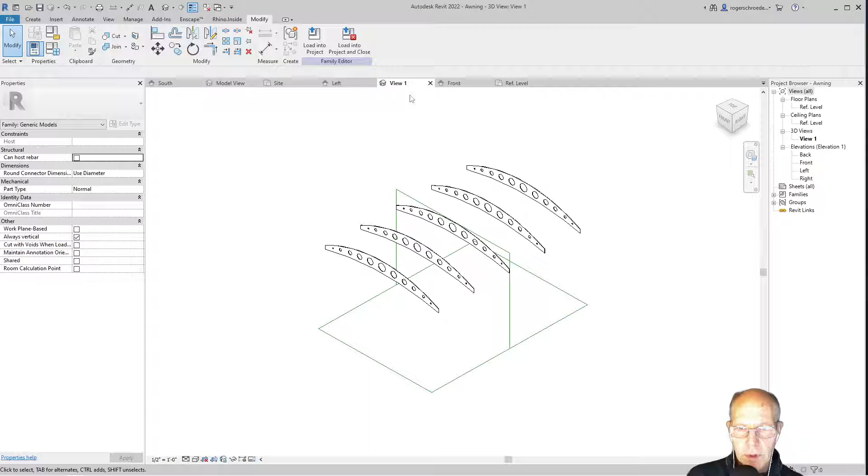So I'm going to go to the front elevation. We're going to start building some glass on this. I'll come up around here, go to Create, and make an extrusion.

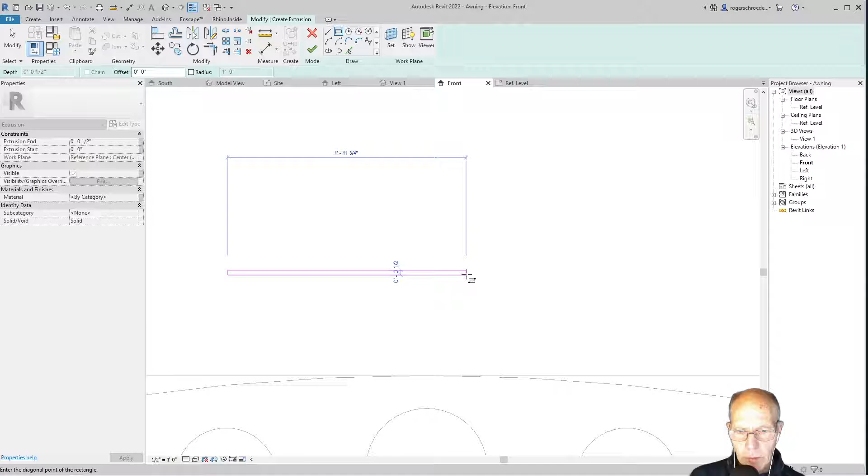I want to zoom in because when we make things that are really thin, sometimes Revit won't allow us to draw them very thin, so I'll show you if the error comes up. We'll make this 2 feet wide, and we'll make it a half inch deep. I'll just select that—it could be lighter than that. So now we have completed a shape.

I want the material of this to be glass, and actually you can just type in glass, G-L-A-S-S, as capital G, and that will assign it. That's a typical well-known texture inside of the software.

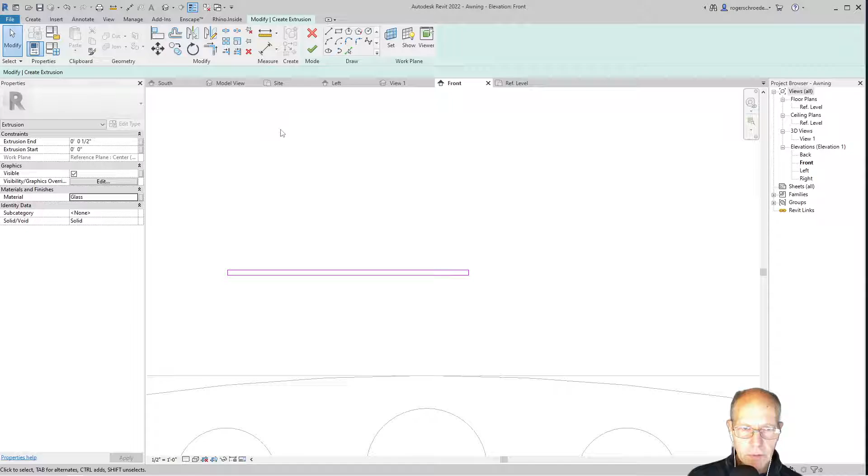So I'll click complete on that, and I will move it to that kind of center point. I'll find the center of this and see if I can come down and place it in that center. And now if we go and look at this from the reference level, actually, once again, we can't do that because we don't have that.

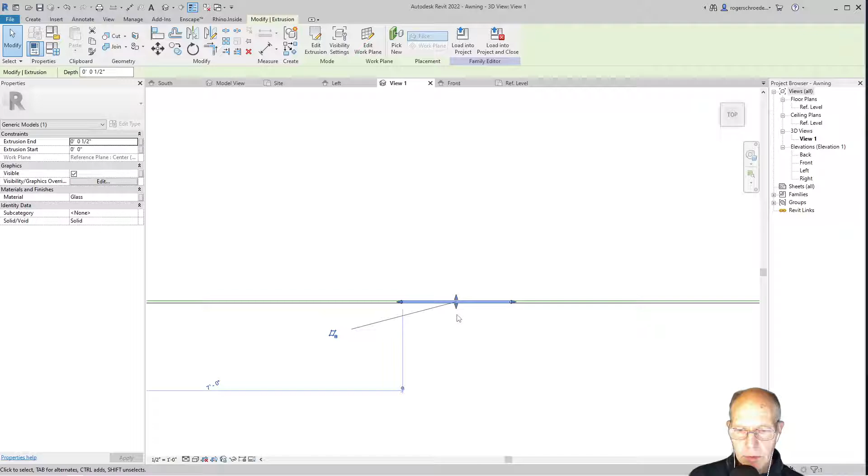I'll just come to the top view. Why I say that doesn't show is because we're just up too high from the floor level. So we now have made that the same extrusion as the rib that we have.

So I'm going to actually stretch this out now, and I'll just pull both sides of this. That's that piece of glass we have. And then I'll zoom out, and we'll use our reference lines that we've created to pull this glass out until it's the 22-foot length.

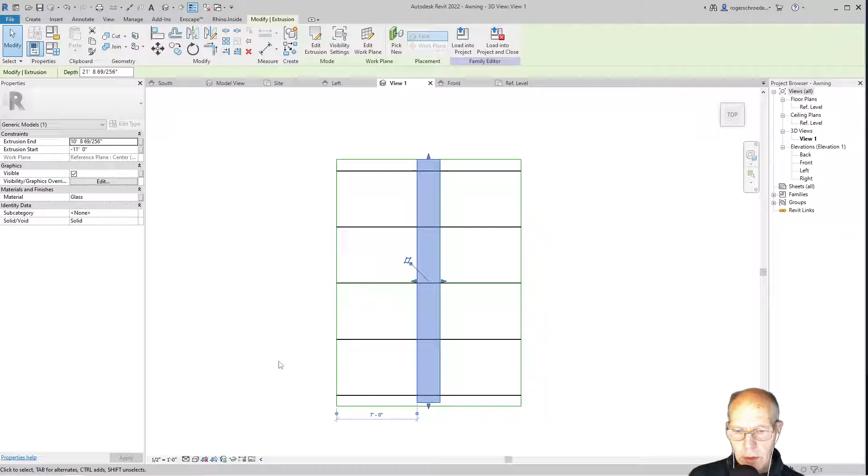And so now we just need to shingle this along the side. So I'll go to the front elevation, and we'll start making a few copies, at least 3 copies here. Select this, and I'll use the copy tool. I'll come and grab this bottom corner and move it over here.

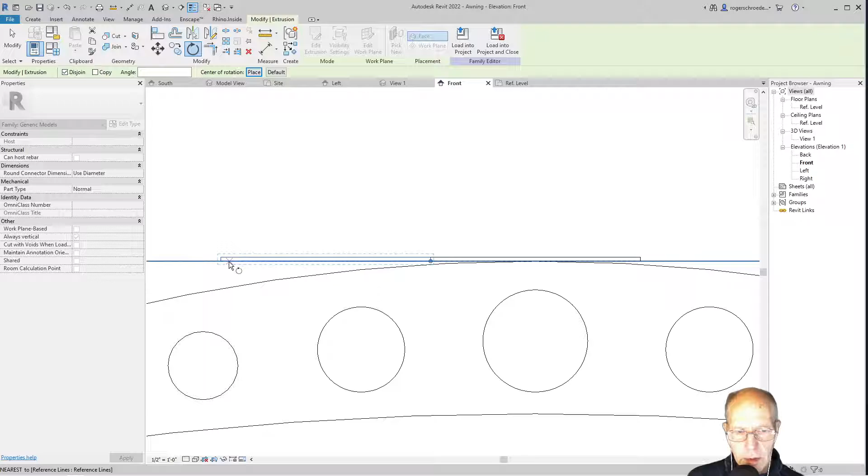And now I'm going to rotate it. I'm going to place the center of rotation because I want to make a decision where I rotate it. I'll come to this end, and then I'll just pull this down until it looks like it's going to come in contact with that surface. This is just an approximation at this point.

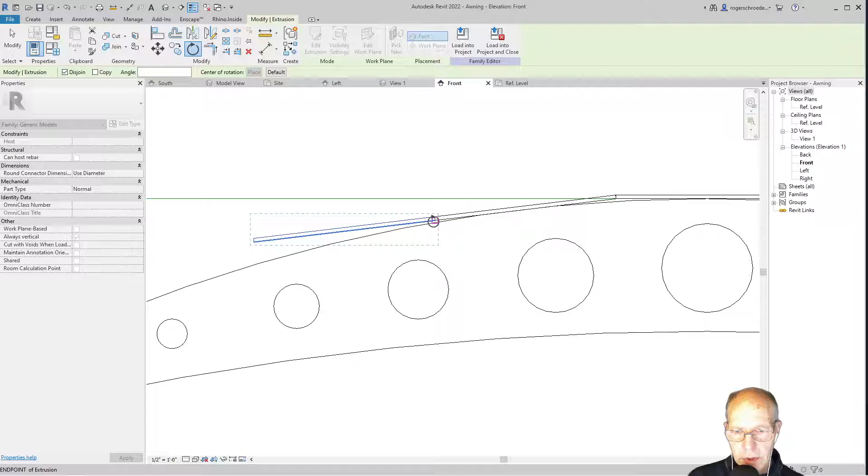Once again, I'm going to use the copy tool, come back to grab that point, put it in the same point again, and use the rotation tool, once again placing the rotation point. I selected place, come to this edge. I'll zoom in here a little bit and rotate it down until it looks like it's touching that surface. And then we'll repeat that one more time.

And I'll use the rotate tool. Excuse me if I'm too close to the mic there.

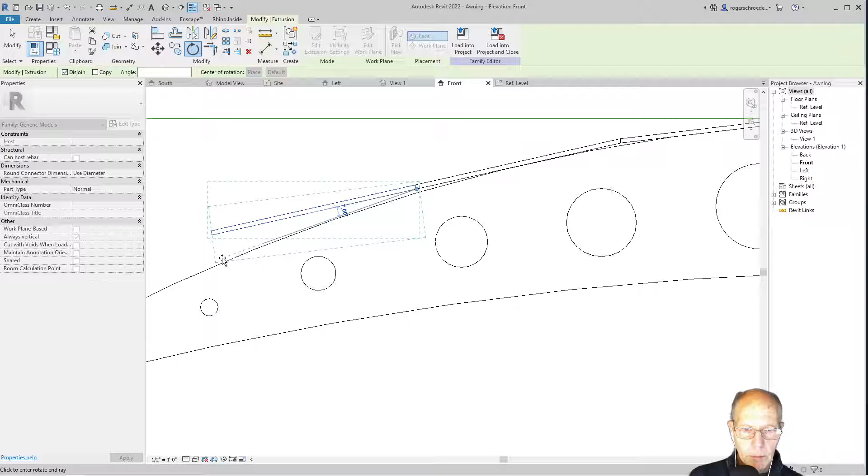And we'll bring it back down again. And now we have a bunch of panels in place.

So let's just grab 3 of those, the 3 that we made, and we'll mirror them over to the other side.

We'll check our work in the 3D view, and I'll go to an angled view there. And so now we have that glass applied.

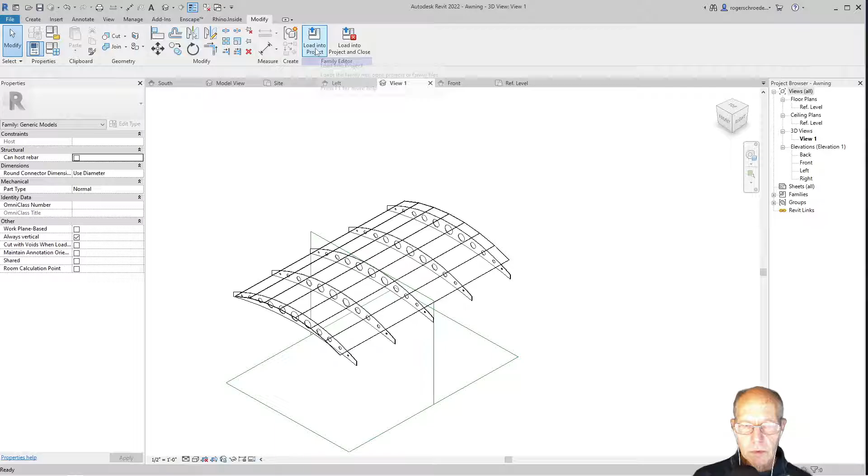So let's go ahead and save it to make sure we don't lose the work, and then load it into the project. Since I closed off the curve, we're not getting a choice of which one to put it in, and we're going to just overwrite it. You can see how it highlighted there, a little bit. And we'll put it in this view, and now you can see the glass.

So in the final clip for this, we'll look at putting a gutter on the edges of this awning we've created next.